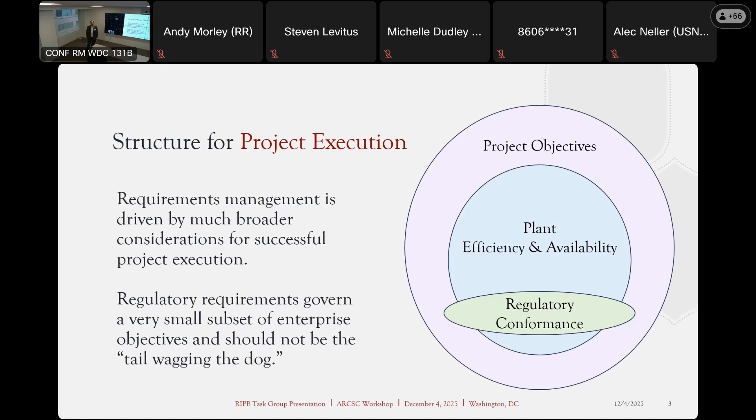So in terms of the regulatory requirements, it could be a small subset, and it should not be what determines the viability of the whole project itself. That's what I think of as a truly performance-based implementation of nuclear technology.

Now, the existing practices in some ways are not optimal to realize these kinds of objectives. What I think we have found in recent years is that you need practices associated more generally with systems engineering, and the kinds of requirements management that is described. I would say where I have found a very good description is in the NASA Systems Engineering Handbook.

I see this approach as being cost effective, because without having this kind of traceability of requirements, what tends to happen is you create silos, and there is almost always friction created when you have silos in the process.

So a key part of the systems engineering approach is to have a continuum of requirements between design, construction, operation, and decommissioning. And this is where current practices are not consistent with what I think of as efficiency.

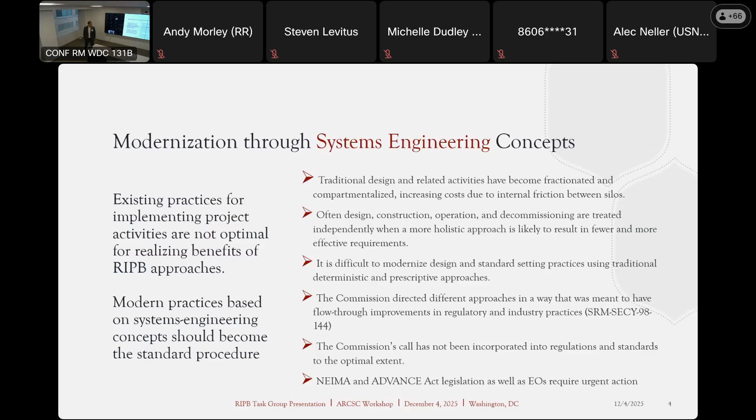So this is where this idea of requirements management and the way it is defined in the NASA handbook comes in very handy. Requirements management is the process of documenting, analyzing, tracking, and verifying requirements throughout the system development lifecycle.

The purpose of an objectives-driven structure for a reactor product, that reactor product is just one part of the overall project. And the objectives of the reactor product would be based on a set of requirements in which all the acceptance criteria on the objectives would contribute to the overall mission statement as shown on the right.

That's the pyramid that Rani used in her presentation. And what you see on the left is a graphic from the standard ANS 30.3, which also calls for a sort of structure in which you begin with the plant level safety functions, and then you decompose those safety functions into greater and greater levels of detail until you get down into the component levels.

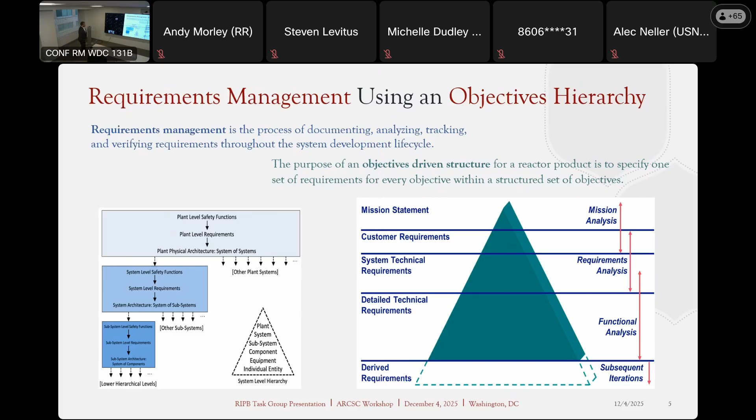Thank you, John. That was very helpful to make the connection with what's going on today. Next slide.

So the point that I'm making over here is just very simple, that there is a symbiotic relationship between what designers do and what standards developers do. Because the designers say, I need a standard that does XYZ, as Rani described what deep fission needs. Now, we can have standards that have a lot of detail in it, but if they're not necessary to meet the designer's needs, then it should be possible to just say, well, it's nice that the standard exists, but I don't need it.

I'm going to find a voluntary consensus standard that has been certified by an accrediting organization. And what we use in this country is ANSI, the American National Standards Institute. They have all the process requirements to create what are called American National Standards. And so if it is an American National Standard, then it's more important to focus on project success and avoid all the frictions, and I believe save a lot of money along those lines.

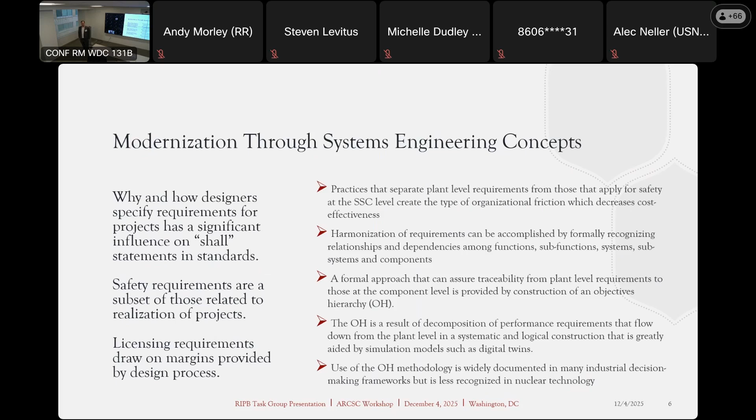So all this is possible if we use a methodology that is described in the NRC's guidance document for performance-based approaches, NUREG-BR-0303, which Rani referred to. And this methodology provides for this kind of traceability and the tracking of requirements. So, next slide.

And one thing I want to add is, how do you use this as someone working on a standard within an SDO? These standards were developed over many years and very good, but with some assumptions around what the high level mission was, right? ASCE 43 for a very long time rightly assumed the building is containment, it cannot leak. That is no longer a necessary assumption. So any design requirements in that standard that flowed down from the building cannot leak are not required for some of these designs. Similar with IEEE, the single failure criterion was so baked into the regulations, it is assumed to never go away.

LMP says that as long as you can ensure reliability, it obviates the need for strict compliance with the single failure criterion. So any parts of those standards that are laser focused on that criterion could allow for more flexibility, more performance-based approaches. And I think that sort of thing can inform any standard out there, going back to the purpose and making sure that the standard allows flexibility for these different purposes that you want it to be used for.

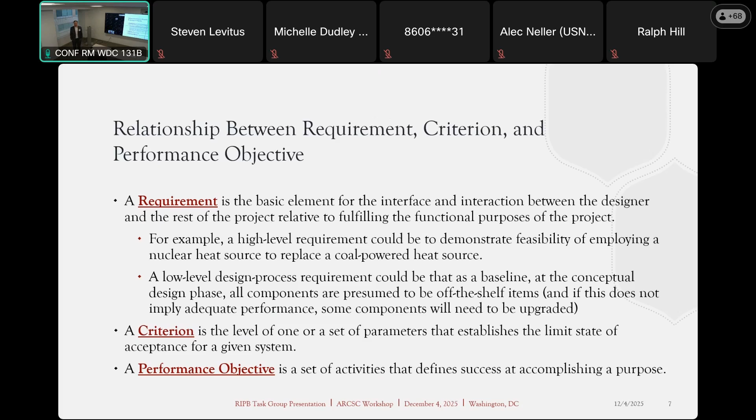So if I'm beginning with the requirement, let's say the high level requirement is just deployment of a reactor heat source in place of a coal-powered heat source. That would be the high level requirement.

At the lower levels, where you have a high degree of detail specified, it should be possible to look for procurement of off-the-shelf items for your components, and see to what extent they will be able to fulfill the functional aspects of what is needed to make this reactor work. Reactor, and also all the heat conversion system.

So the criterion is just setting this level that assures you meet your objectives, and the objective itself is just a set of activities directed at accomplishing a purpose.

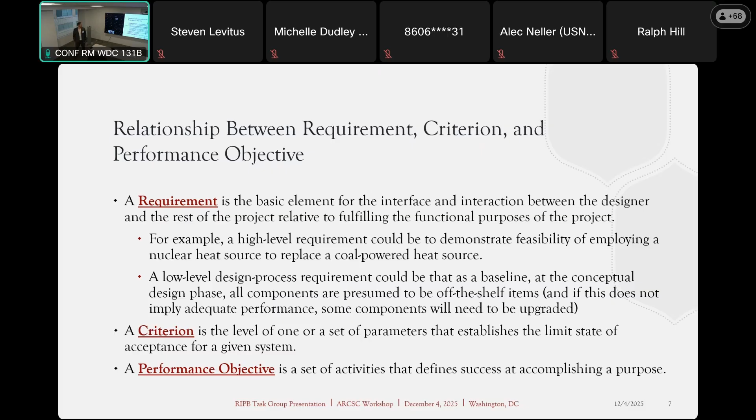In terms of what we are doing in the task group, the RIPB task group, this guidance document already has referenced a wide range of existing documents. We have identified a lot of the documents. In fact, right now, I would say something like 80% of all the documents needed are already identified.

We haven't necessarily provided all the details on each of these documents and how they meet the attributes. But in general, the kind of document we refer to is a guidance document currently being used in ANS, RP3C.

This guidance document describes the attributes of the risk-informed approach and the performance-based approach. The risk-informed attributes are related to reliabilities, whereas the performance-based attributes reflect margins, expressed as differences between system states. So a system can have, under normal operating conditions, an acceptable range, but there would be some set of conditions at which the parameters associated with this operational state would become unacceptable, either because of changes in the physical environment or other scenarios imposed.

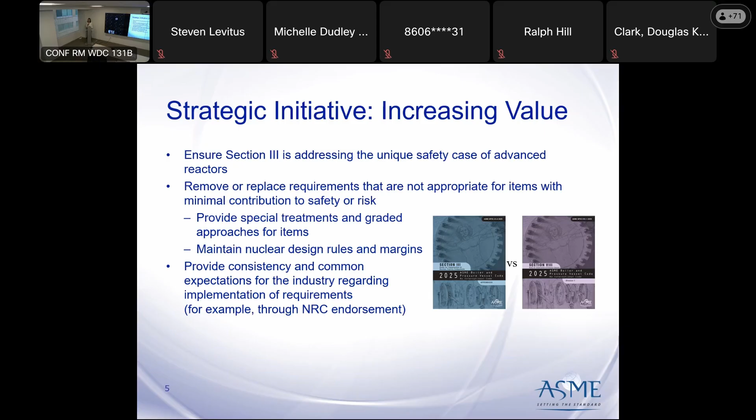Again, similar to the risk-informed performance-based thinking discussed previously, we're trying to define minimum requirements and use the technical basis of the safety categorization to support that, providing it in the Section 3 standard.

I know many people are thinking, why Section 3? There's a lot of codes and standards out there. I am not saying that Section 3 is the appropriate option for everyone based on your safety case. There are very many unique needs, and we saw a need based on our discussions with stakeholders to provide an option within the framework of Section 3 if it is advantageous.

Some of those reasons might be that there is a single code of construction, and that is very beneficial to streamlining the process for getting certification. It appropriately accounts for the unique requirements of nuclear applications. I can speak more to the technical details some other time, but that includes some of the creep design life and other seismic rules that you have access to in nuclear codes that you don't have in commercial codes at the moment.

As an aside, Section 3 is actually working with Section 8 to talk through some of those design rule gaps and maybe help address those, so there is some collaboration going on there. This was a topic of interest earlier as well, but at least at this point in time, when there is some concern about regulatory acceptance, as the industry moves towards this different way of thinking, the use of the consensus standard is very helpful to reducing uncertainty and improving regulatory acceptance of these designs.

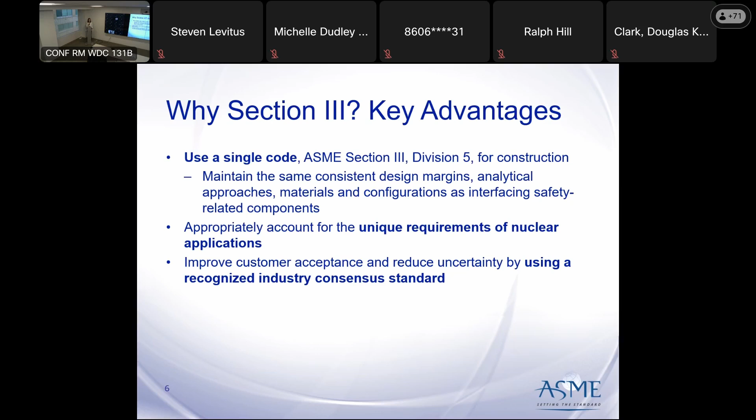At Section 3, we played our find-the-money game and looked for ways where industrial code requirements offered improved value compared to the nuclear construction requirements. The key areas we found were material procurement, NDE and testing, and quality assurance. We came up with a long-term strategy that we started way back in early 2021 and have continued to date to get options out there to users to take advantage of each of these.

Rather than trying to tackle this in one big case, which we started trying to do, we have tackled it in bits and pieces, and that has helped us gain acceptance along the way and hopefully pave the way towards more larger scale strategic changes, which I'll talk through with the task group on Div 6 shortly.

So the first rule that exists out there is alternate requirements for material procurement. All these alternate requirements are for components within this scope, which we call commensurate with their contribution to safety or risk—our fancy way of trying to be categorization-process agnostic—for just the components that fall in the intermediate safety category, where special treatments are required, but full high safety and full stamping to Section 3 may not be required. That's been recognized through the regulatory framework. This permits, within the scope of Section 3 for this scope of components, procurement from a supplier other than a material organization, helping address some of the supply chain issues we've heard about.

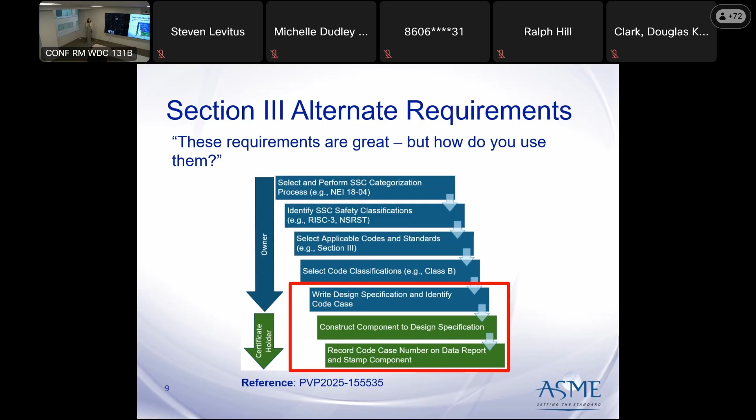The other activity I want to highlight is investigating the creation of Division 6. This is not actually the goal—this name was selected as a way to intentionally engage differently and at a higher, more comprehensive level than what we were doing at the task group on alternate requirements. That's because through the work we've been doing on alternate requirements, we identified a number of themes and challenges to implementation within the current framework, in ways that perhaps limit the utility of the rules we're working through, based on some of what we're hearing from stakeholders.

One issue is supply chain being key for cost and schedule of construction. If you need to stamp to Section 3, there's no way to simply apply or accept another standard's rules and still stamp to Section 3. But we only have a limited scope of Section 3 certificate holders compared to the demands of the industry. So we really needed to determine an overall strategy to construction and stamping that is defined and permitted by the code, if we want to continue making this user-friendly and a good option for folks to consider.

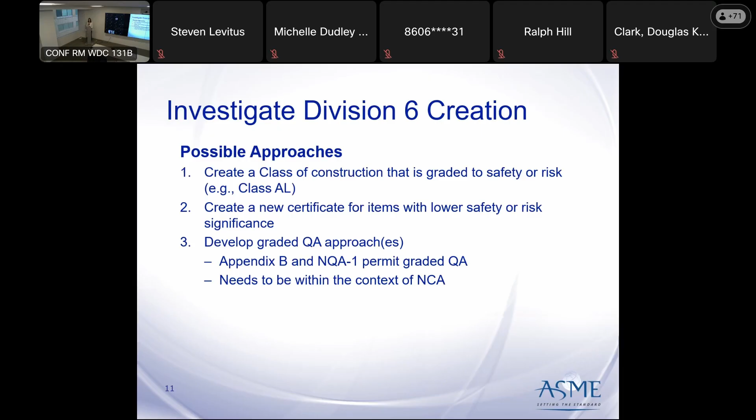Just to wrap this up, I hope this discussion highlights that the Section 3 committee actions are driven by input and needs from stakeholders that show up and participate, and the overall focus areas we have are driven by strategic objectives from the leadership team. Our work on alternate requirements for items commensurate with their contribution to safety or risk is benefited by the consensus process and expert reviews from the code committee members, which I think is a very high value add of using a consensus standard like Section 3.

I hope everyone will walk away from this presentation with the understanding that Section 3 is reestablishing construction rules that evolve nearly real time with industry and stakeholder needs. Last slide is just for discussion, but thank you everyone for listening and your time.

Rachel, one of the things I'm trying to understand better is how ASME and ANS define the term components as part of what we call SSCs. For example, in your presentation, you described ASME standards as applicable to manufacture of components, right? In ANS, the basic unit we use is SSC, taken directly from Part 50, and 50.2 talks about systems, structures, and components. I'm trying to see how, within the ASME rules for construction of components, that relates to SSCs. Is there a definition within the ASME framework for how components relate to SSCs? So the question is: is there discussion on how ANS defines structures, systems, and components, and ASME is a component construction code, and is there any definition within ASME on how this component definition relates to the ANS definition?

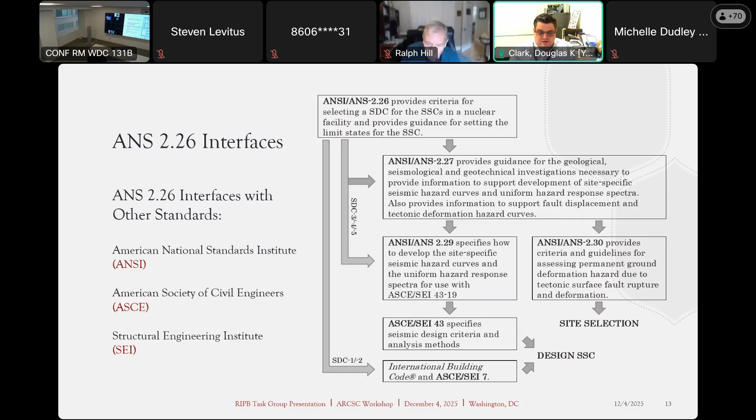The standard has always had a mix of qualitative criteria and quantitative criteria, which then step up based off of the consequences to the workers, the public, and the environment. As we get to the quantitative table, which has been in Appendix A, it's in lockstep with DOE and a lot of the regulation points in the enabling legislation. So 25 REM to the public will generally get you into that SDC 4, Seismic Design Category 4 limit.

But you still have the option in the 2004 version of using these qualitative thresholds. There has been a move to more quantitative just for consistency basis, but they're in there, and it's a graded approach or risk-informed approach based off of consequences.

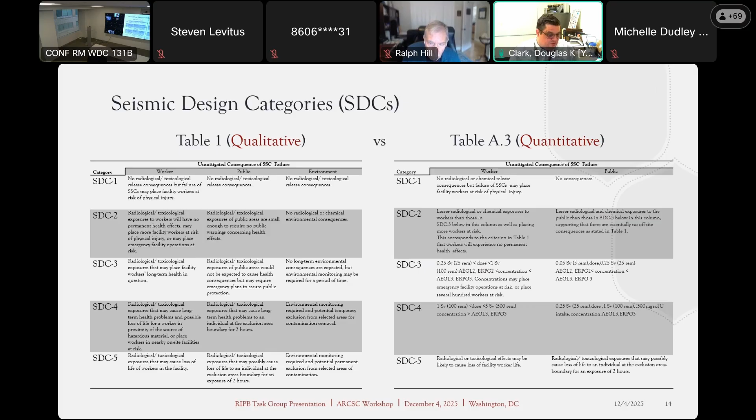Next slide, please. The main thing that everyone comes to 2.26 for is this limit state, and I'm going to address limit states A, B, C, and D. Basically, it's going to say what is the damage. Some of the terms have been used differently. The terms on this slide are straight out of the standard.

DOE basically states that limit state D is going to function before, during, and after an accident, and they grade the approach through otherwise. There are appendices in the standard that basically go through the component level. What are you looking at? This helps the designer up front and the analysts look at the component they're at in their system while they're designing it and feed back into the designers what needed limit state they have. That's going to be for any objective in the objectives hierarchy.

What generally happens in application here is the final limit state that is fed back for the seismic design demand is the highest limit state that they identified for any upset. But here's the examples. There's some for structure. There's some for the buildings. It's quite a long appendix if you wish to go look at that.

But once you've assigned the limit state based off of your component, now you move into a structured approach. So next slide, please.

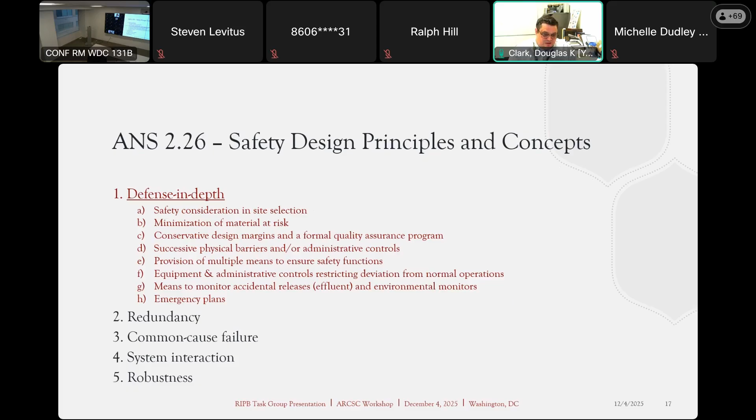The other portion we want to focus on that gets into the regulator aspect and gets into the subsequent reviews, we want to look at how you address system interaction. We want to avoid common cause failure to the maximum extent possible, and we give various options for doing that.

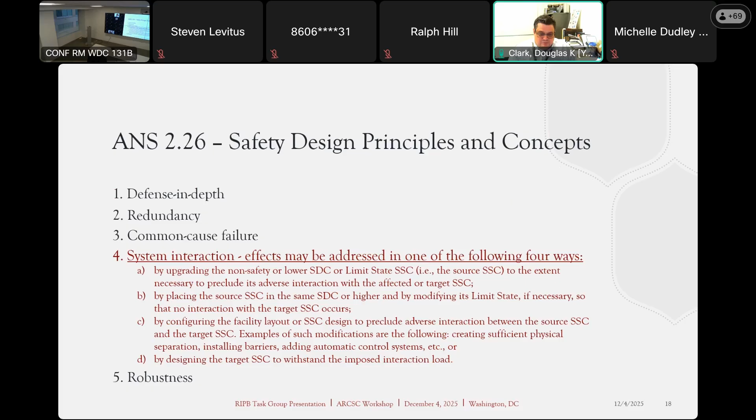That allows the designer not necessarily to pick one for the entire plant, but to move system by system based on what you're getting for certain components. You may choose one of these system interactions more so than the other. Next slide, please.

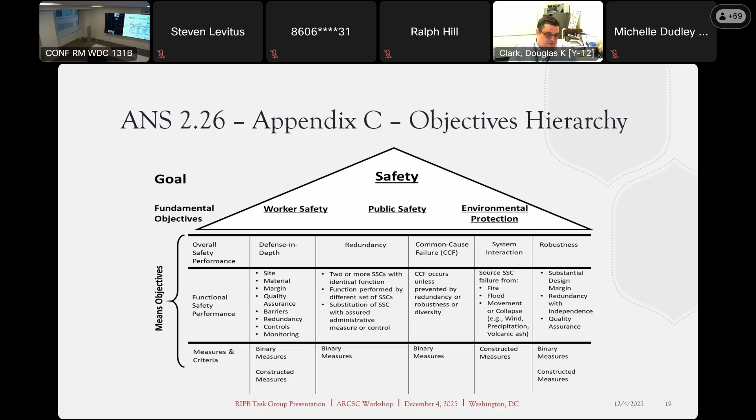Next slide, please. So if you'll pardon my analogy here, we have the single barrier castle and we have defense in depth. Which one do we want to incentivize? Which one do you use? Some projects will tell you they want to fix their footprint and have just a single barrier because only one component should be expensive.

Well, that doesn't meet our defense in depth goals. You can make that single barrier as robust as you can possibly do it, but it's a trade-off. On the defense in depth concept, we can have high redundancy, high reliability, and very low system interaction, which gives us a very low risk of common cause failure, and it gives you the flexibility to respond fairly quickly.

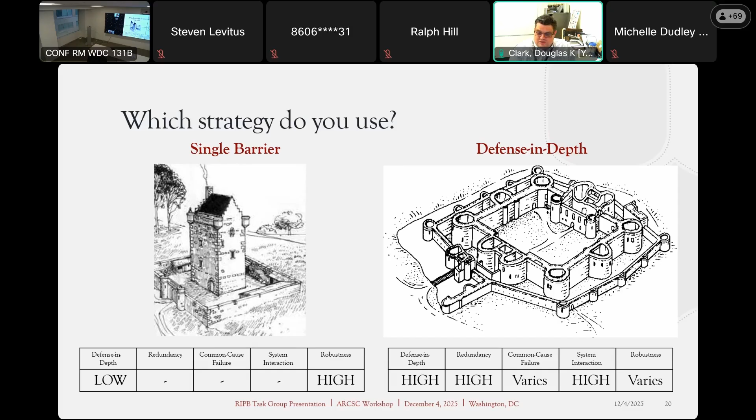In the standard, next slide, please. In the standard, as you're addressing the various different portions for these constructed attributes, for these binary measures, and for each of the categories, you have an allocation and you have an implementation.

The allocation is normally done in the design, and that's going to feed into what Brian and then we're going to talk about with ASCE 43. We have examples on just picking your strategy up front. The Department of Energy uses a safety design strategy in the early stages of a project that's basically going to be an agreement on how the SSC performance is allocated in the design.

Once we get through that design process, there's always changes. We have the implementation measures that allow us to go through and make sure that we have met the allocated performance levels and we're meeting the fundamental objectives in the objectives hierarchy.

We're still assigning SDCs based off of the most significant negative consequences, and we're moving to being a little more explicit on what some of the risk-informed options can be, but this is the standard as it exists right now. Next slide, please.

We have many design alternatives that can be used to meet the fundamental objectives. We have natural measures, which can be your siting, your distance, your emergency planning zone, your roads, other things that are in the community, preparedness procedures.

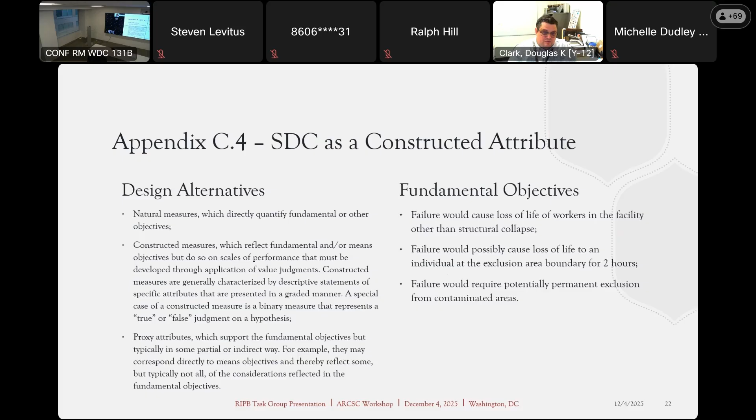Now, next slide please. We'll go through an example of where the standard is specifically talking about binary measures and where judgment is required. This is the section we're going to go through.

Are you using airborne release fractions? Are you using this level of documentation? Are you using this complexity? Or on the judgment side, how much redundancy do you need? What is the common cause failure?

A lot of the judgment that we use on the DOE side is order of magnitude judgment. It doesn't require a lot of definition, but on the judgment required side, you can sharpen that pencil as much as you need to as you iterate and agree with your regulator.

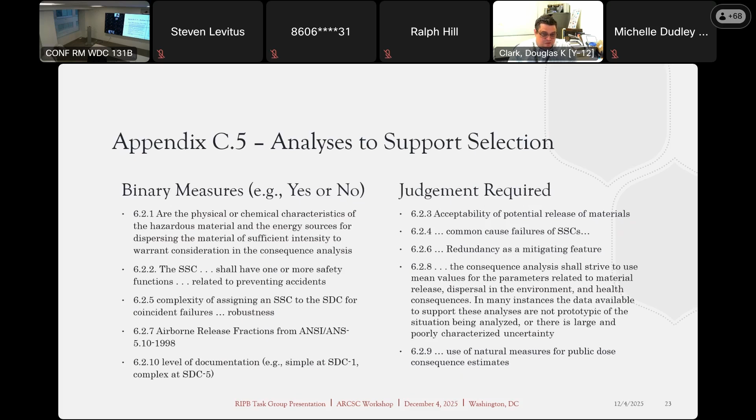Next slide please. So the performance-based approach and the official NRC attributes want something measurable. It can be calculable, but generally something measurable that can be verified to monitor a system. You can look at something to be put in your license.

The objective criteria, we do use some deterministic analyses. For tried and true equipment, you can use performance history. But you do have the flexibility to meet how you establish the performance criteria.

We're trying to incentivize various outcomes and encourage the defense in depth nature and the performance-based nature of the overall design. The framework is there to continue to evaluate upsets and deviations that ensure the outcome does not have any immediate safety concerns to any of the receptors, such that the fundamental objectives are met.

This is intended to achieve the highest possible level of safety at a reasonable cost, without forcing sites to be mirror images of each other. It allows you to tailor it to what you've got and not have a one size fits all approach.

Next slide please. So the practical implementation of the performance-based approach is really focused on these 5 attributes: something for the auditors to verify, something that is quite objective in how you're going to accept and ensure that your allocations were correct in your implementation.

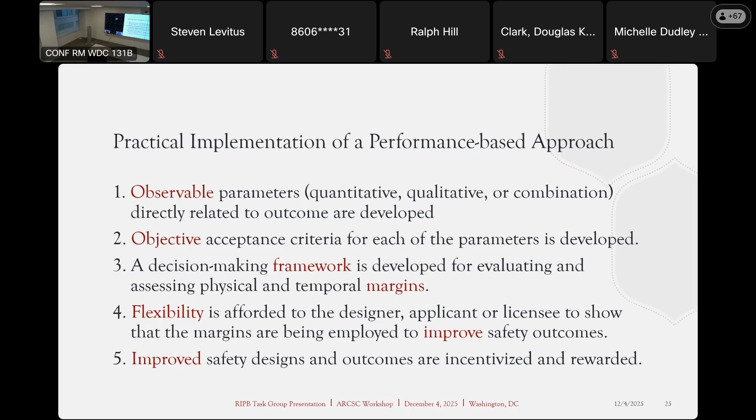Well, anyway, my response is that the issue of the functional containment is an example of how an existing regulation can just be interpreted in a performance-based way. In other words, GDC 16, that's the General Design Criterion 16 on the containment, was interpreted for the longest time to be a leak-tight containment, and it was in 2018 that the NRC put out a SECY paper and the commission accepted it, making the idea of a functional containment to be acceptable. So the point I'm making is that a lot of these regulations have become deterministic and prescriptive through regulatory practice, and not because the regulation itself is prescriptive. In many cases, the regulation is very performance-based in that it very clearly identifies what is the safety function to be fulfilled. So for this to work, you really require the regulator to really change their approach to how they make these determinations.

Exactly. And that's the reason why I'm hoping that the regulator will be more involved in the type of guidance that we are developing. But in order for the regulator to be involved, I feel that it is the regulated industry that has to present the regulator with the specific cases where they have used the performance-based approach, and the NRC is then forced to review it in a performance-based way.

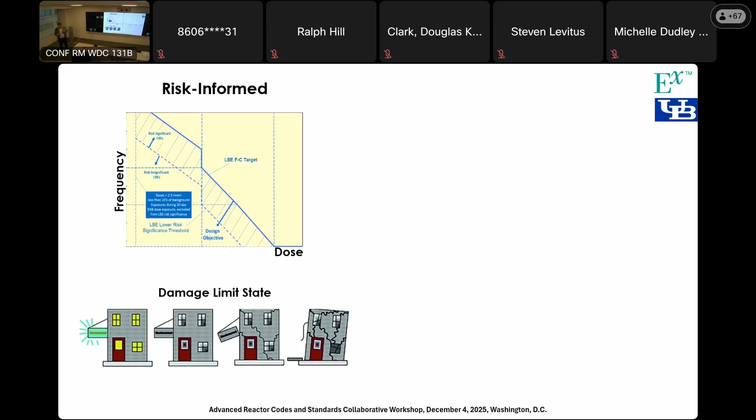For instance, for any particular SSC, they might decide that the limit state—the third one from the left—is tolerable, and it'll give this much dose. So the dose increases from left to right, and the allowable frequency, think of it as a yearly probability of occurrence, goes down. The more dose, the less tolerant you are of it—the lower the frequency has to be to maintain that risk. This is risk informed: somebody's thinking about this and saying, I can give the structural engineer these two things and have them design a structure that meets this.

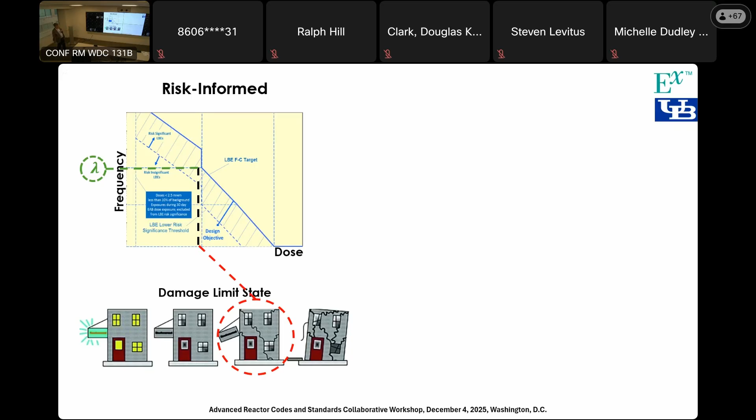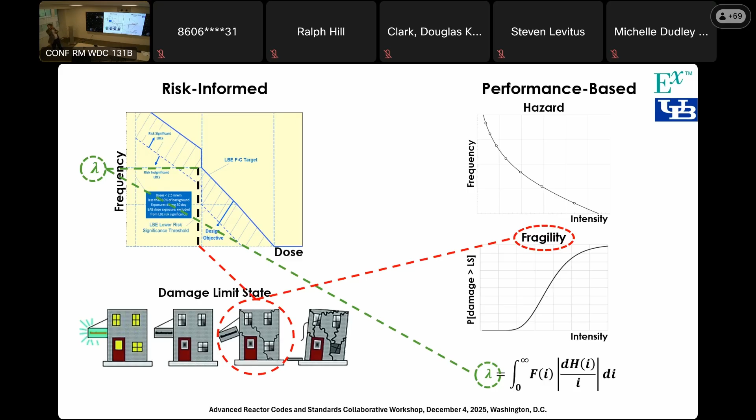Oh, okay, sorry, stop here.

I forgot this, so this is a repeat. The big box on the left with the red shading is done by people that know a lot more about this than me, done by the owner or the regulator. Risk-informed, performance-based, that's where I'm happy. That's my sandbox. I can give you a structure that meets those two criteria.

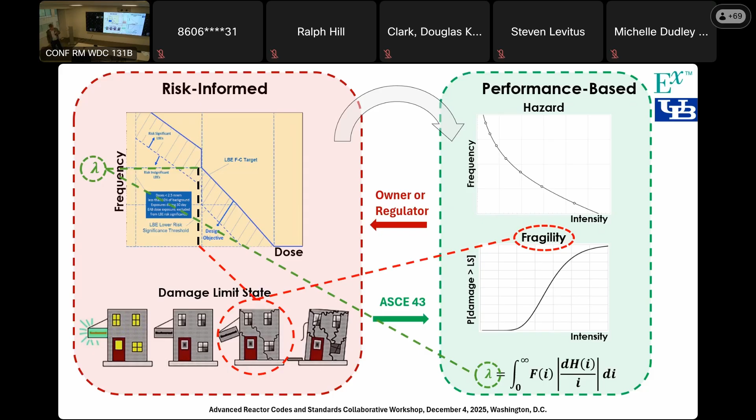Next slide. So this is our document. It's going to be a combination of ASCE standards 4 and 43, actually called ASCE 92. That might be a number familiar to some of you on an atomic scale. This is a standard that shows engineers how to do performance-based design, given the risk-informed criteria from ANS 2.26.

If you click again, these are documents from the other side of the wall. 2.26 is there. I imagine there will be the same thing from the NRC and maybe other sources on how you do this risk-informed selection of damage state and frequency. And then if you click again, these are the ASCE standards.

So there's been some talk about standards getting longer and longer. We're as guilty as anyone else about that. We are not going to recreate every requirement for how much rebar you put in, how you bend the rebar, all that kind of stuff. That's already done by our colleagues.

I'll point out ASCE 41 is a performance-based standard for design in commercial space. In the early 90s, when we put together the performance-based requirements for nuclear structures, that was in it too. They were both in their infancy, kind of based on each other. Now, ASCE 41 in commercial space, I don't think I'm exaggerating saying there's been 1,000 times more structures designed for that standard than our standard ASCE 43. There's just a lot more commercial structures out there being retrofit and designed.

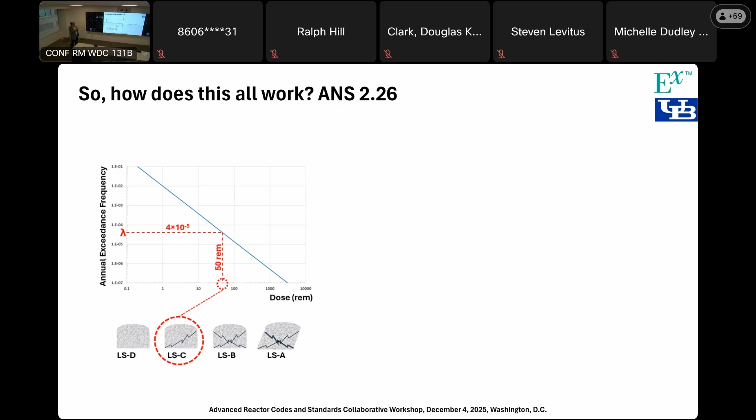This is out of Doug's standard, 2.26. There's a seismic design category that you pick, one of 2, 3, 4, or 5. 4 happens to be 4 times 10 to the minus 5 here. Arbitrary, it could be a sliding scale, it doesn't have to be one of those 4. And then limit state C, limited permanent distortion, minimal.

So you come out of 2.26 with those two numbers, and you walk across the street to the structural engineer's office. Click, please. And you give your structural engineer those two numbers.

Now this is a graded design. As the probability of failure goes down, your design becomes more robust, so you can pick any of these to get the robustness you want that way. And also as the allowable damage goes down, your design gets more robust. So I think John was saying that 43, when used for light water reactors, was not quite performance-based design, because you always pick D, you know, stay essentially elastic, and you always pick seismic design 5, the highest of the categories here. But you can pick any of those.

So that's the graded design. I think maybe, Richard, this goes to your question just prior to this talk about how do you pick the risk, how does the risk get in there. This is how it does in this case. Next, click, please.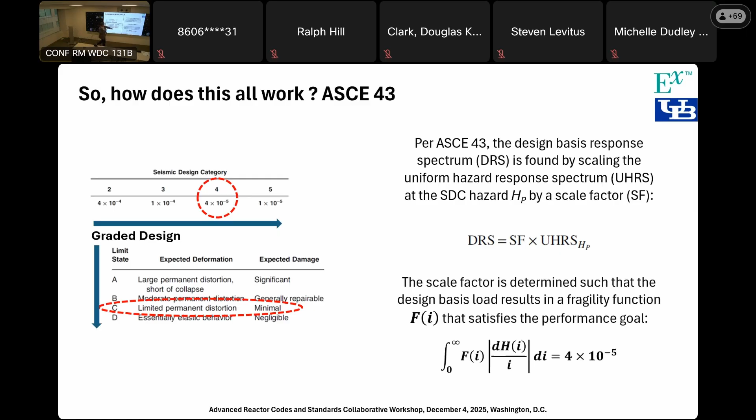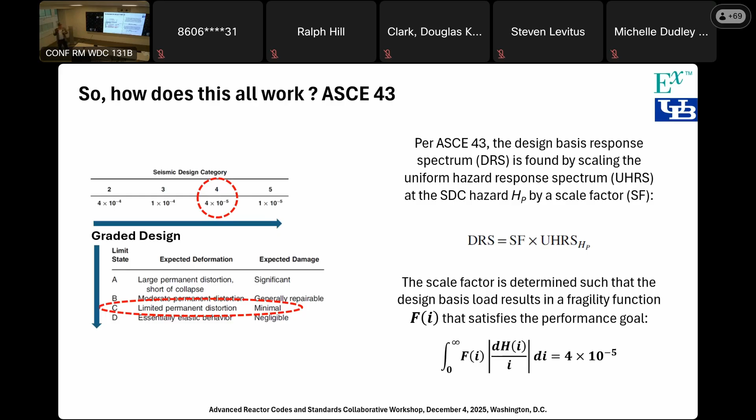ASCE 43 gives you the design loads on the structure that will meet the target fragility I showed before, meeting the performance requirements. It comes in the form of a scale factor on the uniform hazard response spectrum, with an equation for that in the code. All of the performance-based design is built in, such that when you design to this scale factor, you satisfy that equation. That's transparent to the designer. It looks like a prescriptive requirement because we have to simplify things, we engineers aren't all that bright, so we don't want too many numbers or to be doing integrals. So we make it look prescriptive, but it's really all built in.

So this is the conclusion of my part. I wanted to convince you that we know what we're doing with RIPB. We've been doing it for a long time. We only need really two pieces of information: what's the allowable damage, and how often can you tolerate that. The other thing is how to do that shouldn't be prescribed. We shouldn't be telling contractors to use seven sacks of cement in their concrete mix. We tell them, when you build this building, we want 7 KSI concrete, and aggregate that's not susceptible to ASR and all that kind of stuff.

What Andrew's going to talk about is that last sub-bullet, the opportunities this gives us. If people are truly committed to doing RIPB, it allows you to right-size your codes and make things easier for everybody, as long as we're all on the same page, which is why Doug and I have people on each of the committees watching to make sure 2.26 and what's going to be ASCE 92 play nicely together.

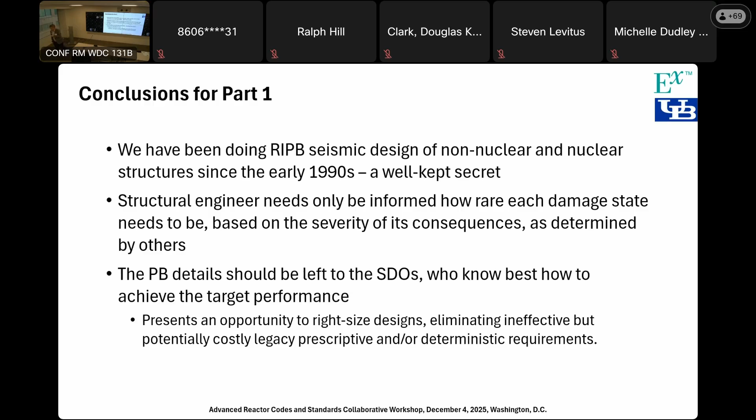All right, I'm going to go take a sip of water. It's all yours. Thank you, Brian. So I'm Sean Connery, and I'm happy to follow George Clooney.

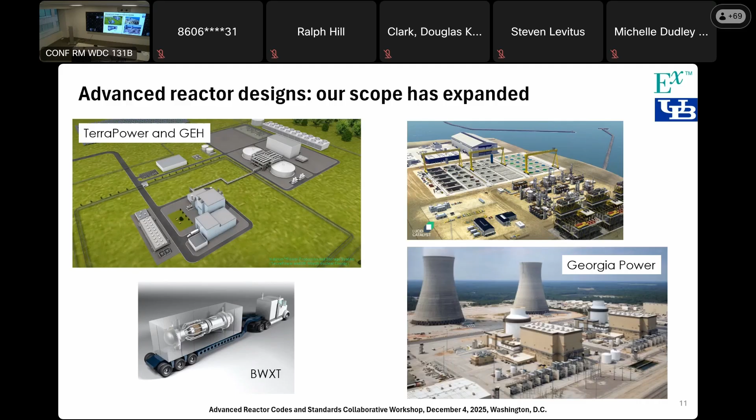The second part to this talk is about right-sizing requirements for nuclear civil structures. As we write ASCE 92, pivoting away from 4 and 43, we recognize that in the nuclear energy space, beyond DOE space, our scope has changed. As we write or update this standard, we need to accommodate gigawatt scale reactors, limit state D, seismic design category 5, but also micros and advanced reactors, small modular reactors like the Natrium build for TerraPower and GEH, through to a different application using high temperature gas reactors to support production of synthetic hydrogen. This is a very different application than a gigawatt scale reactor. So as we write this standard, we've got this expanded scope to deal with.

Not lost on me, not lost on Brian, and I think not lost on anyone in this room is the scope of our enterprise going forward. As we think through how we right-size nuclear civil structures, recognizing that the civil structures part of a nuclear plant currently represents 55% of the total cost, and we need to get that back down to about 20% of the cost of the asset. We have a rate of deployment that's unprecedented. So what we've done for the last 25, 30 years is not going to work for us going forward. We need to think how we can speed deployments while maintaining safety.

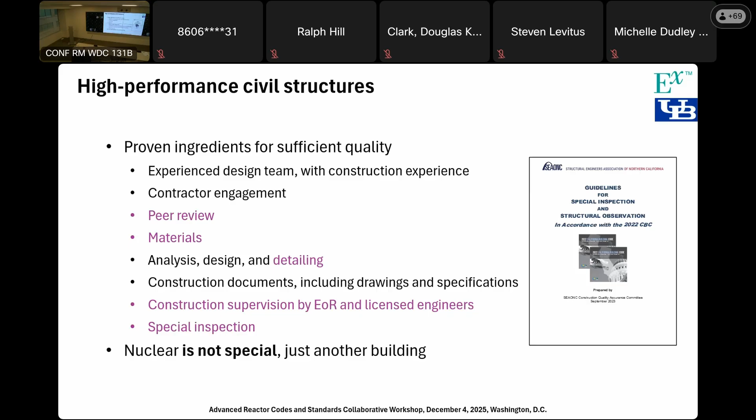But the most important bullet here is the last one. Nuclear is not special. We might like to think it is. It's not, at least in civil structures. It's just another building, and we've got to start thinking like that. Next slide, please.

So, concrete. Everyone has some understanding of concrete. Someone mentioned testing concrete, and we have a standard test that's been around for many decades called a cylinder test. Most folks don't realise it's a test for quality control, not really a test for concrete strength, despite what some people think. But the fact of the matter is, if you follow our non-nuclear material standards in the United States - and there are similar standards in Canada, Australia where I was born, the United Kingdom, and Europe - you will have in-service strength that will always exceed the minimum specified compressive strength, kind of guaranteed. Yet we tend to wring our hands and worry about this value of F'(C), the concrete strength.

So I asked the question: is it important? Would a 25% reduction in concrete strength affect the shear strength of a beam, a column, or a wall? No, the effect would be insignificant. Would it affect axial strength? No, not really. Richart at the University of Illinois Urbana-Champaign figured this out in 1930 and developed rules that still exist in ACI 318 to address this. In terms of deformation capacity, a 25% reduction in concrete strength might actually increase the deformation capacity of components, not decrease it. So we tend to focus on the things we're comfortable with, not necessarily the things that are important. Next slide, please.

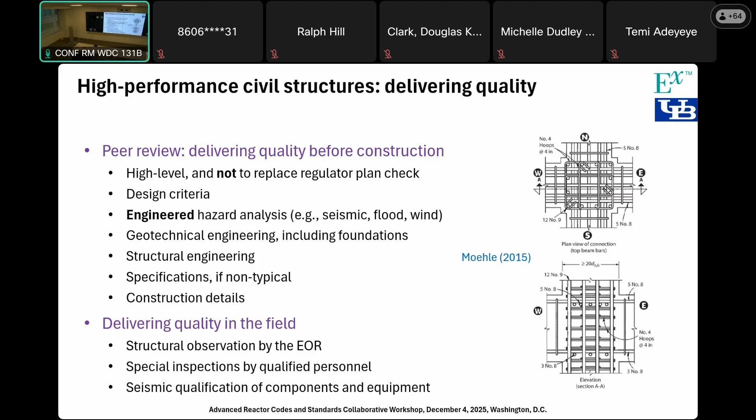So as we think through delivering quality in ASCE 92, NQA1 was not written for civil structures. In fact, it's a stunningly poor fit for civil structures. So our current plan is to dial back to Appendix B to 10 CFR 50, and there are 18 items to be addressed, and about half of them are related to civil structures. So we plan to address those, probably about 8 or 9 that are applicable to civil structures directly by pointing to construction practice, codes and standards in non-nuclear space.

Why is that sufficient? Because we've been delivering high performance civil structures in non-nuclear space for decades. So we think this is a speedier pathway to delivering more than sufficient quality within the framework of using existing non-nuclear standards, but also recognising the role of Appendix B to 10 CFR 50. So we need a mapping. We think we have a mapping. Next slide, please.

So this is a slide generated for one of my colleagues in the room. It talks a little about seismic hazard, credible and incredible. We've talked about elimination of one incredible hazard a little earlier today with aircraft impact, hopefully moving off to one side. Another topic we're going to think a little about is incredible earthquake shaking.

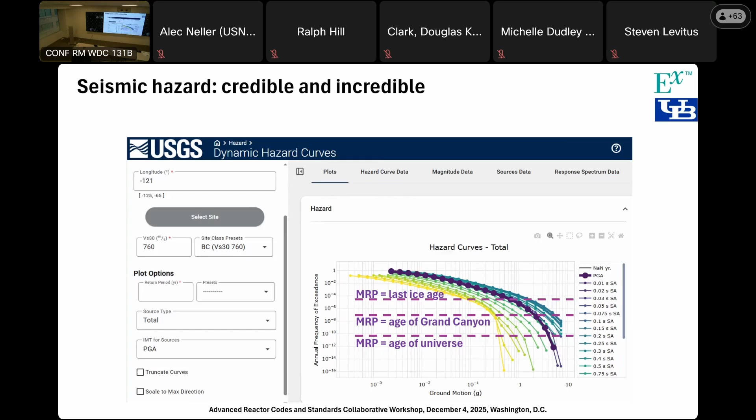So we need to think about the problem differently. For civil structures, the RIPB framework is set. As Brian said, we know what to do. We need input from others to help define the limit states, to identify the target performance goals or the seismic design categories. Given that information, we can deliver a building design.

And we anticipate there will be significant changes in ASCE 92 with respect to ASCE 43, with respect to QAQC, whether or not we need to deploy soil structure interaction analysis, when site-specific hazard calculations are needed, and perhaps when we can pivot to the USGS tool. The focus here is to speed deployment, but not compromise safety one little bit.

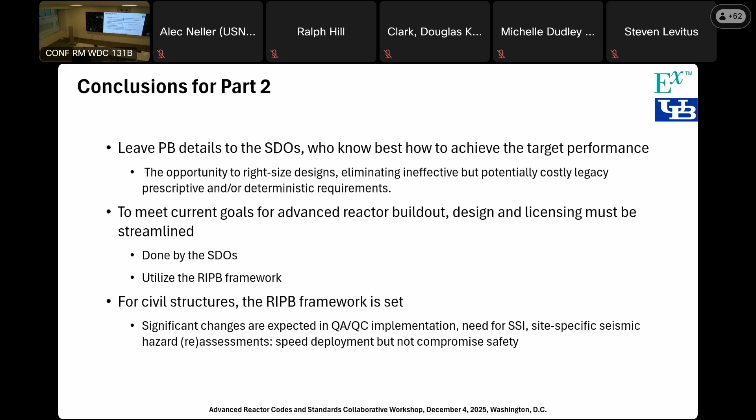And I think the last slide gets back to an important topic of defence in depth. No, second to last slide. So, no death by PowerPoint. I think we've achieved that goal.

We'd like to now have a conversation where you ask questions of Brian and me about anything related to civil structures, but I've seeded the discussion here. So what didn't we talk about?

We've talked a little about ASCE and risk-informed performance-based design, how we harmonise across the SDOs. A number of us have talked today about how we stay in our swim lanes so we don't lead to conflict between the SDOs, so the SDOs can work together efficiently.

And then one important point here is integration within the disciplines. So within civil engineering, we have the ASCE standards, the ACI standards, and the AISC standards, and we don't yet speak the same language completely. So we need to do a better job within our discipline in order to deliver on risk-informed performance-based design for the industry.

Now, the last slide deals with a really important topic of defence in depth, and it's meant to foster some discussion going forward. And you see what happens to Sean and George.

So when Brian and I are thinking about how to talk about defence in depth, well, when I was a young boy, which is a long time ago, it used to be called belt and suspenders. The chap on the left, if that belt fails, we have a wardrobe malfunction. The chap on the right, his belt fails - let's hope his suspenders are seismically qualified, or at least weight qualified.

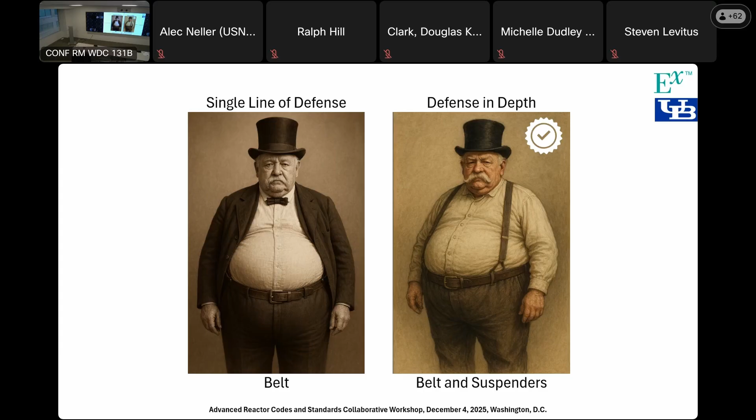Well, I was just going to start off with an observation or comment online, and there was a response as well to the point you made, which I think you knew you were going to get a response to. Someone online is disagreeing and saying, well, nuclear is special, because of radiation hazards. But someone else online pointed out that radiation is another hazard, but there are other ones that are commonly designed for in commercial structures as well. So I just wanted to fill that out and let you maybe respond.

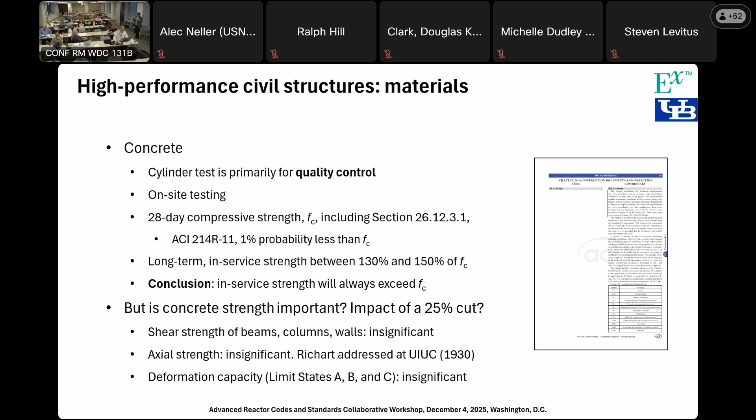Yeah, I think it's a good comment - what's different about nuclear? And I will point the person who made that comment back to the slide that showed the graph from 18-04. That's specifically set up for radiation dose and release of radiation. You can go to the graph and pick out what margin you want - we used to call them safety factors, margins. But basically, what is your tolerable annual probability of failure, a probability of exceeding the limit state that might lead to that failure.

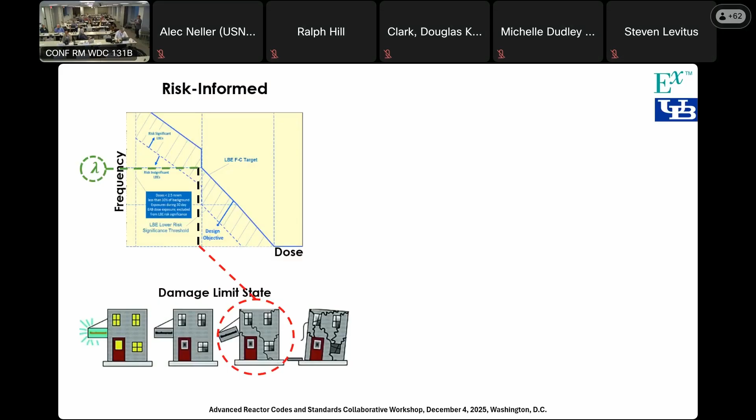So it is built in, and it could very well be that if there's a possibility of a large release of radioactive material, then you'll be designing to limit state D and SDC5, like we did with all the old light water reactors. So you can pick your risk, and you can inform your engineer of that risk.

Normally we disagree on everything, but this time around, Brian, I agree with you. Must be wrong. Yeah, it's Mike Milton. This is great. I don't know. I also agree with that comment.

If you were my contractor, I'd want to hear from you that nuclear is special in terms of a safety culture as we do business. And while we may be fueled by TRISO fuel and looking at a functional containment, maybe we just need a reactor building to maintain a vacuum or functional, everybody at the table needs to understand nuclear is special.

Quiet. Please finish. Ignore him. You guys are great.

My other comment is I see all that rebar and I see expense, you know, money. So where are you at? I used to work at Palo Verde and I was involved in tendon inspections, and it was pretty darn special with those tendon reinforcements, with the domes, and maybe that's going to go away. John says maybe there'll be a change. Where are you at? Technology-wise, inexpensive concrete building design now, with alternative ways instead of having to have massive rebar.

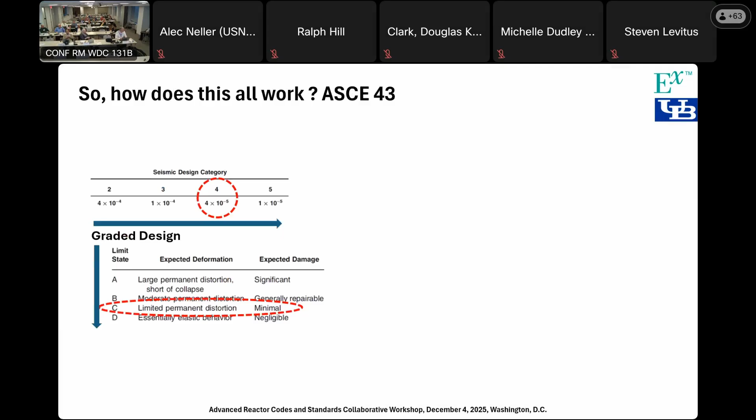The engineering—think back to the two images that I showed you. Which one did you like? The one on the right. Less rebar, well detailed, carefully thought through. No, I didn't like that at all. Yeah, you want no columns, I get it.

But the point is, you can have brute force design, and it generally doesn't work particularly well, or you can use more elegant design. The engineer who designed the connection on the left is not of the caliber of the person who designed the connection on the right. If there had been rigorous peer review, the detail on the left would have been discarded, set aside. The one on the right delivers quality at a much reduced cost compared to the one on the left, which is unbuildable. So that's part one.

Part two is we are working on how you enable the use of precast reinforced concrete. ACI 349, for no good reason, doesn't permit it. ACI 318 for building structures, limit states A, B, C, and D, has permitted it since 1999. So the pivot to the non-nuclear standards is going to improve options, ensure that the design is modern, and I think lead to much lower cost, higher quality civil structures.

Now, correct what I've said, please. Unfortunately, I agree with everything you said. But at the risk of being glib, I want to go back to nuclear is special. Nuclear structures are special—A, see NEI 18-04, and B, well, special compared to what?

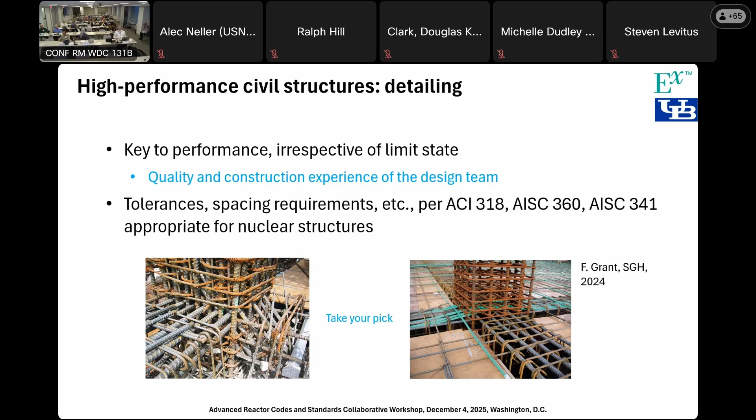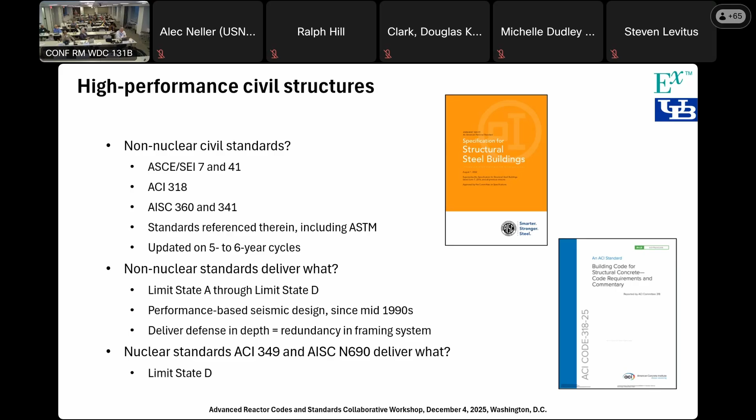So just one thing. When we first started to have the idea that we wanted a chapter in our standard that applied to QA and QC of civil structures, we talked to people at the NRC about this, and the consistent message we got back was, hey, you just have to meet the intent of the appendix. So our goal starting off was, okay, we will write a chapter where we map to the 18 parts of the appendix and show that we meet the intent of each and every one of them.

Other questions? Well, I think Suresh, we chopped you off. My simple question was, you mentioned that some level of radiation release is acceptable as part of this. Can you explain that a little bit more?

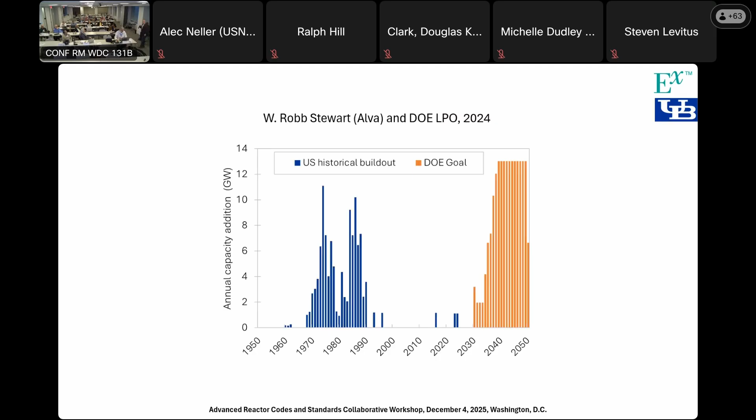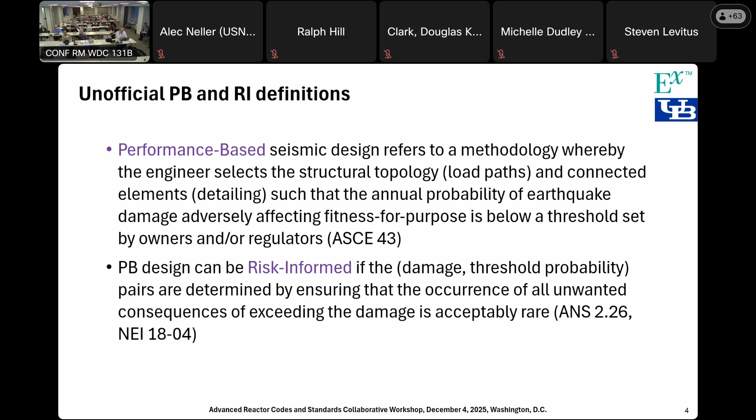Slide 5, please. There you go, we'll advance one more. Nope, yeah, you can leave it right there. So what—

Just to go back, a nuclear building is not special per se. It's not an intelligent structure, it doesn't adapt to suit its environment. The point, as Brian pointed out, is that you pick a limit state based on acceptable damage at a given mean annual frequency of exceedance. That is input to our process. Once that's input to the process, what the radionuclides are is not relevant to the design of the building. So if you look at the ASCE standards, we don't talk about radionuclides.

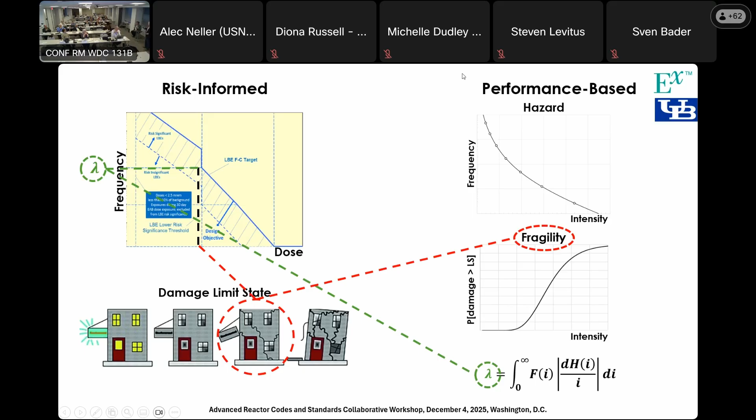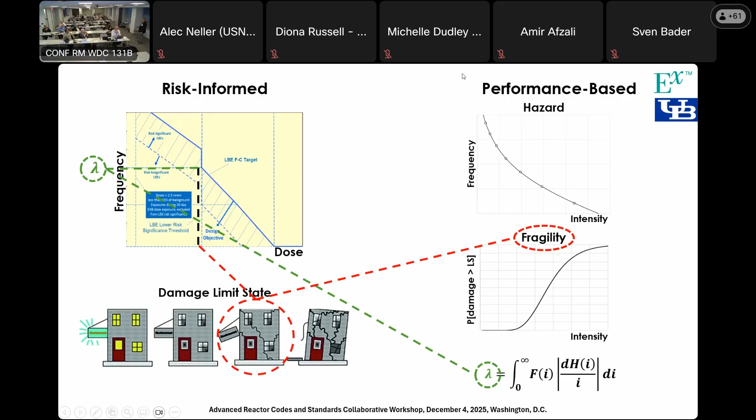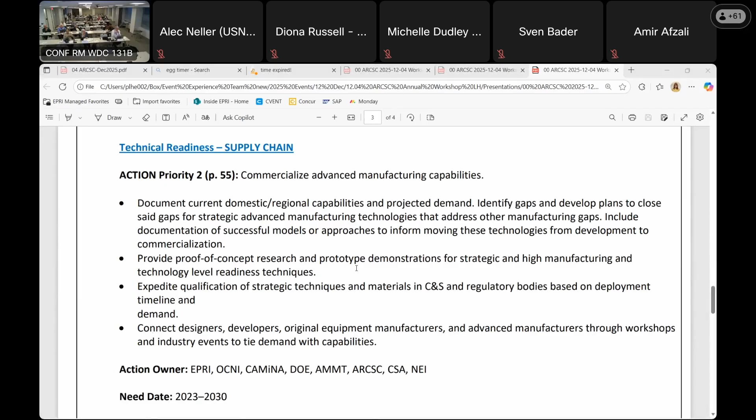Now, George, I think our time's up. Yep, you gotta have somebody calling the shots here. Thank you so much. Hate to cut off conversation, but that's the whole point of this. Really appreciate it, but we got to move on to the next topic. We're going back to the roadmap. Yeah, you hate to get off a subject as interesting as this, but there's going to be an awful lot of discussions that continue on this from different perspectives. But thanks again, Brian and Andrew, for that very informative discussion and interaction.

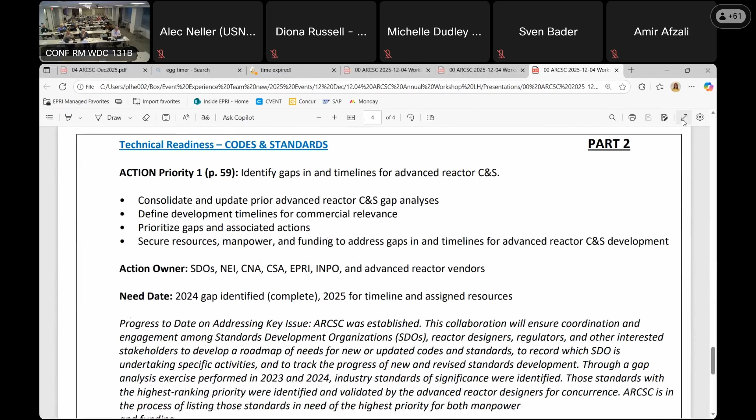Thank you. This is going to be very quick because the time is running short. We've talked about this multiple times, not only in the past at our biweekly meetings of ARCSC, but even today in various aspects. But I do want to point out a few things here, because it's something we need to address moving forward.

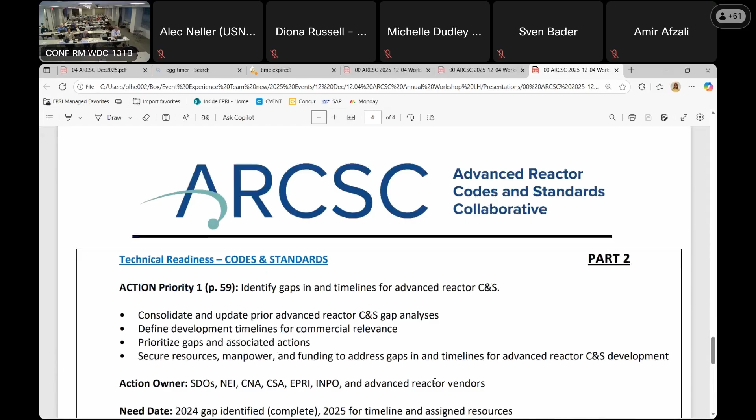The fourth bullet under the first set there for priority one: secure resources, manpower, and funding. This is something the implementation board is looking for from ARCSC on how we see this moving forward in 2026. This is a priority, and I know I can continue to ask for input and feedback on people's perspective on this, and I am looking for everybody's input and perspectives on where we see this moving forward.

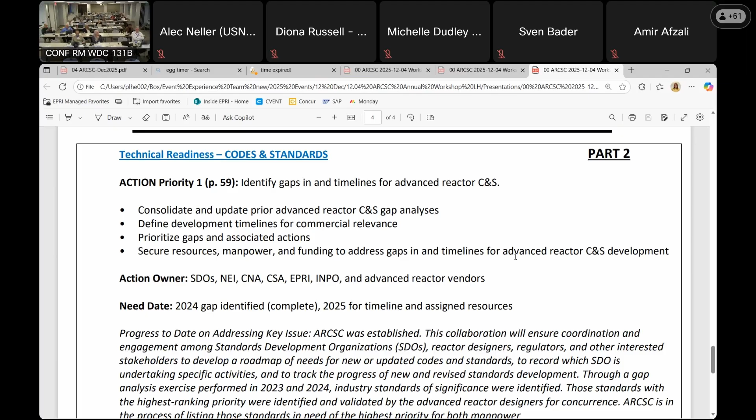For accelerating the timelines to have this ready for the deployment of advanced reactors, a need date of 2025 for timeline and assigned resources, and I've got that pushed out, obviously, to 2026 now. John, if you can move that up a little bit to the next paragraph, that would be great.

That's good right there. The last sentence on that first one, under progress, for the first one: ARCSC is in the process of listing those standards in need of the highest priority for both manpower and funding. And that is true, and we have done that. We've submitted the priorities to the regulators, to DOE.

What I want to mention here is that in conversations recently with DOE at the ANS Winter Conference we just had in Washington with Garrett Smith, he says if you submit a proposal for a specific need for a standard or standards with the reasoning behind it, they will support whatever effort they can. They don't want a big list of everything that needs to be done, but submit specifically what you're looking for and the timelines behind it, and they will support and act on that. So keep that in mind. We will keep that in mind.

Moving now to priority under the RIPB. Just a couple of emphasis points here: update and develop codes and standards to support the RIPB approaches, and update existing codes and standards to incorporate the benefits of RIPB approaches. A lot of that's going on today in different ways, different discussions, different manners, and different aspects. We just talked about structures. We've been talking about RIPB needs across SSCs in a lot of different ways, in documentation and approaches, et cetera.

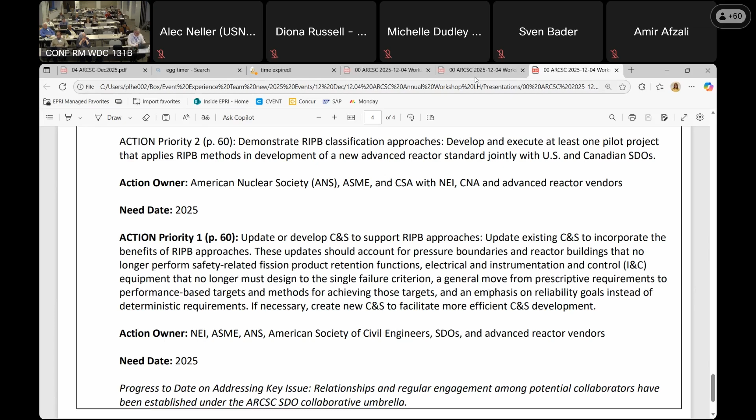Artificial intelligence is a field of computer science focused on building machines that perform tasks typically requiring human intelligence, that includes learning, reasoning, and problem solving. It uses techniques to process data and make decisions in everyday applications. And I think we know that. We're talking way beyond nuclear right now. It's across everything.

But AI has its limits, and we need to recognize that. But it also has its benefits, and we need to recognize them. So applications such as automation and efficiency and improved decision-making are all part of this.

So summarizing, I want to say and leave you with: AI in nuclear energy is to improve safety, efficiency, and maintenance through predictive techniques, real-time monitoring, and optimizing operations. AI is accelerating development of new reactor designs and supporting worker safety, along with accelerating research in the next generation of reactors. And that's what we're talking about. That's what we're looking at right now.

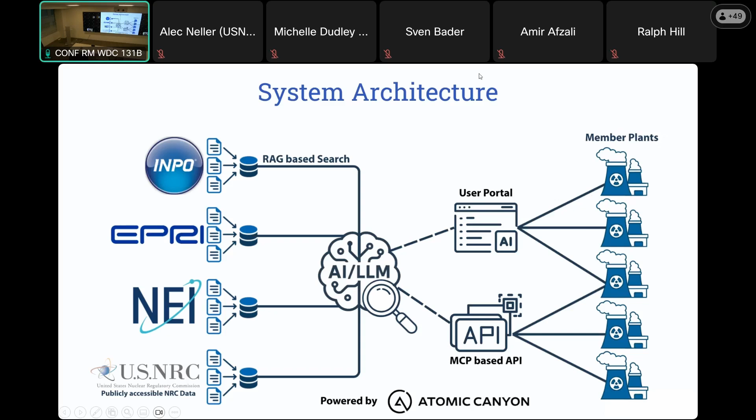Okay, next. All right, well, I'm Todd Anselmi. Some of you online probably wondered why Anselmi is talking about AI. There's a lot of things I know a little bit about, and I can't even take advantage of Ronnie's comment earlier that I've stayed at a Holiday Inn. But I volunteered to facilitate this because I think it's an important subject.

Next slide, John. You'll see I don't have a lot of images because I've got a couple of things I'll show you in a bit. But here, I just wanted to tell you, ANS had a task group get together and do an assessment of what kind of things should or could be considered from an AI perspective. It's not from the software side and development — it's like the subject we talked about, the question of what's the validity of the information we're using. So we could look at things like inputs and outputs. We have a PINS, a project initiation notification system, where we're going to start working on one standard. I don't want to call it getting our feet wet, but there was some hesitancy on what we can do if we do too much all at once, or should we take a first step.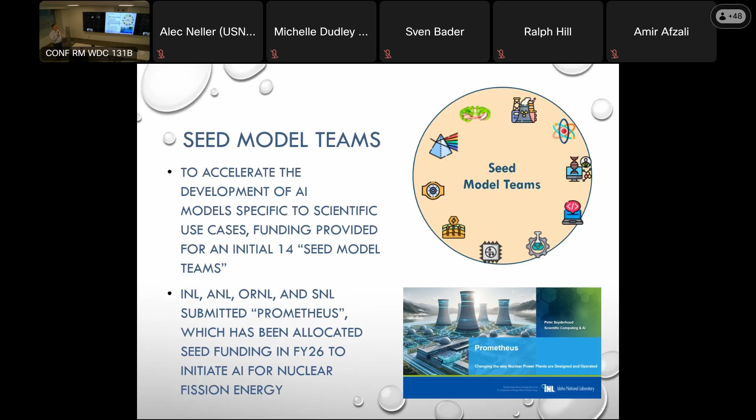Designers that might want to participate in this as well, so I was told to put a plug in. The Prometheus project just got advertised, or just became public a couple of days ago. So there you can see the fission energy use of AI under Prometheus has those four primary labs. Next slide.

The first statement is kind of part of the mission. One thing to keep in mind along the mission of the Genesis mission is it's more than innovation, it's a national imperative to secure energy independence and outpace our global competitors. I think what you've heard is we're talking 500 terawatt hours of electricity in the next 5 years. We need internationally, 179 I think, are some of the numbers for the US, which we've also heard, 400 gigawatts electric by 2050. So the whole basis for the Genesis mission too is the same thing: we're going to power the need for AI, and we need the power for those conditions.

So let's talk about AI. Next slide.

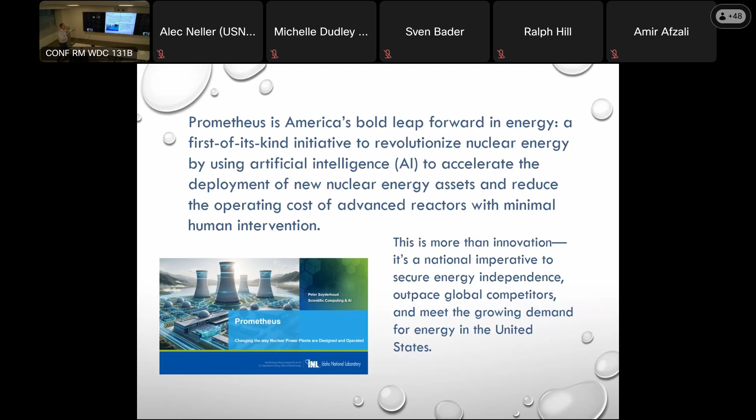Software platform ecosystem capable of accelerating deployment of nuclear fission power plants using autonomous design. So they're actually going to look at how can we design a nuclear facility. I don't have any details on that, it's all just kind of new. Same thing with autonomous operations. It's not to say this will be autonomous from the get-go, but that's the end goal, to look at and then physically demonstrate it. Okay, next slide.

So what would an AI discussion be without trying to apply AI in preparation for the discussion? So here I asked the question: how is AI being used in the nuclear industry?

Now, at Idaho National Lab, we have our own Microsoft Copilot, so we have the ability to look solely on INL licensed stuff versus public. In our Copilot, you hit the work button and type in your question. We're going through major training right now, and we are pushing very hard to utilize AI as a tool at the Idaho National Lab.

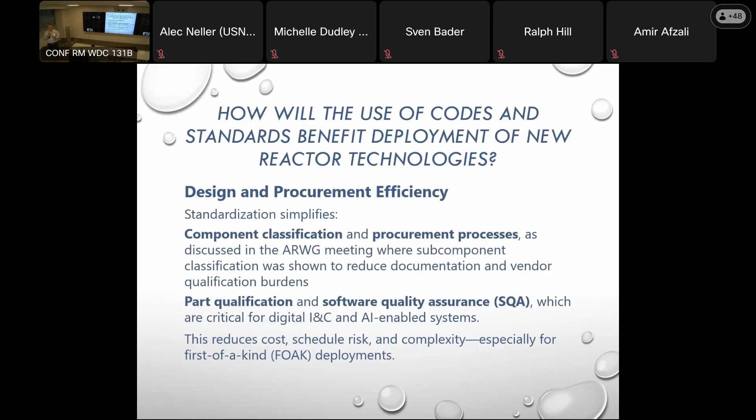Oh sorry, I have two more items. This came from the question of how will the use of codes and standards benefit deployment of new reactor technologies. That was one of the questions I asked. I wasn't planning to talk about it, it'll be in the slide pack. One more slide and then the last one.

Even brought up risk-informed performance-based. So should the industry develop codes and standards on the approach and controls for AI? And if so, who and what? Because we are a collaborative effort amongst the standards development organizations, I talked about what ANS is doing. I know 4 or 5 other organizations are looking at putting a standard of some sort in place. So I thought I'd pose that question here because it could become the next phase of things we can collaborate on. It also allows us to hold each other accountable for trying to get something out if we think it's a high priority standard. So I'm gonna open the floor.

All right, I'm gonna just quickly start online. So the statement online was the last part of the presentation does not seem to comport with what we heard from NEI and on that initiative. So I've interpreted this question to mean, how is the Prometheus initiative aligned or not aligned with the NEI, EPRI, INPO effort?

Or is that something to do in the future, or is that not a consideration? I don't have a direct answer for that, positive or negative, but what I can tell you is Jim did bring up Atomic Canyon. I believe they are also involved with this project because I know they're involved with several of the INL projects. But it is a DOE independent project and it's just gotten started. So I won't say that it's not already aligned, but I'm pretty certain that there will be alignment with it.